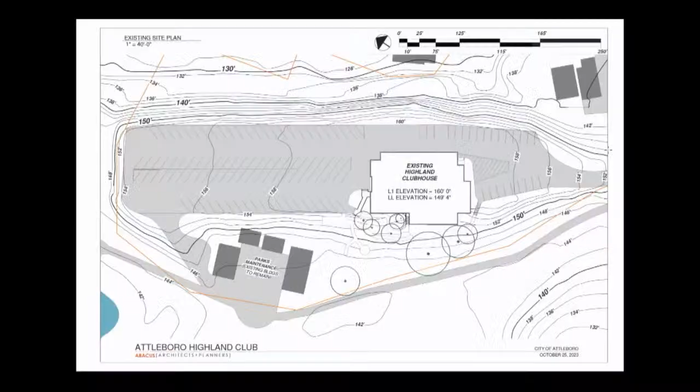We prepared demolition plans of all levels, but didn't include them in this package, but they're in the package that Mason has, and we prepared them obviously for the cost estimator.

So the reuse of the golf club, here's the site plan, and it's largely unchanged. There's some parking spaces just to the above, we can call it, to the east, or where it says rehab of Highland Clubhouse. There's some parking set up along there.

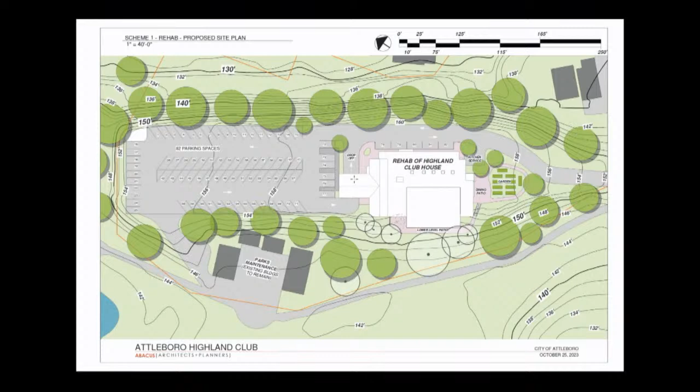The biggest change to the site plan is the covered drop-off, the organization of all of the vehicular circulation throughout the parking lot and throughout the site, with an organized loop where when you drive in, you can come around. There's handicap parking directly adjacent, and then there's a porte cochere or covered drop-off you can drive under. It's wide enough that you can have several cars lined up unloading, as well as other cars can go by. This is a feature of all of the options.

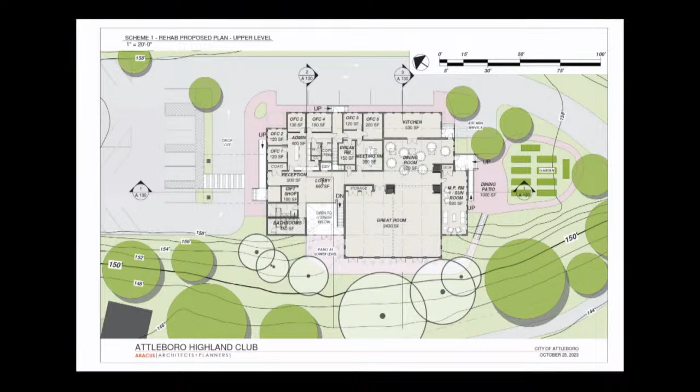The rest of it is really just moving walls, doors, windows. A lot of the building needs to be largely rebuilt to meet stretch code and the energy code, and to bring it up to date.

But there aren't others. That's it for the major moves: the drop off, the open to below, and the raising of the roof on the great room.

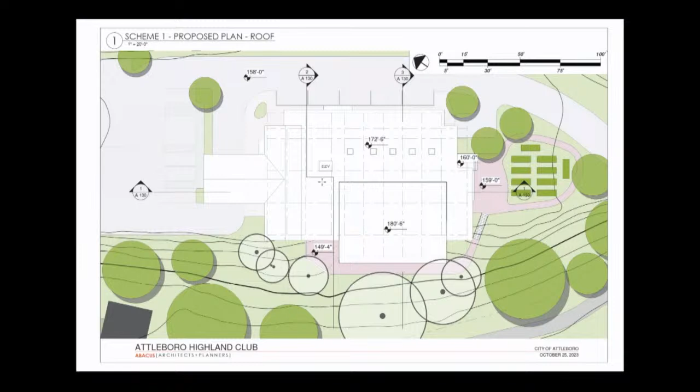And then those four little squares in a row are bringing light into interior rooms, because this is a very big floor plate—over 100 feet in each dimension—so the interior is inherently dark.

Thank you, Madam Mayor, for this suggestion. I think it's a really great suggestion to bring light into those rooms.

So that's the break room—a skylight in the break room, a skylight in the meeting rooms, and then three of these just four by four foot little pop-ups. Not a big deal, but just bringing a little extra light into the dining room.

So you want me to charge on to the other two schemes, or take a breath?

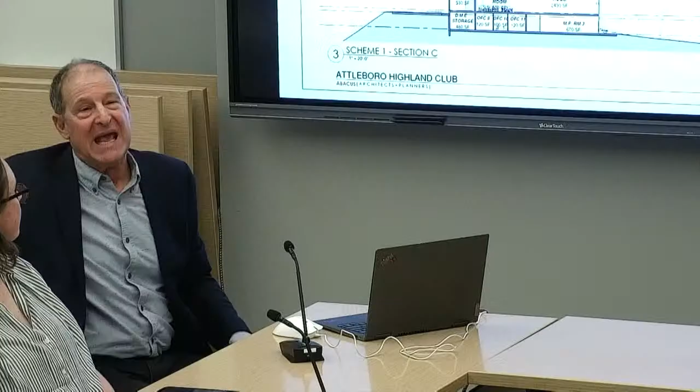This just needs to have paths connecting, it's just a gentle, walkable slope. Okay, you're already down there. But you're not at the fairway level yet, you have to go another 5 or 6 feet from the lower level, over like 80 feet of length, so you really just need a little bit more of a golf cart path.

It's not even, you can do it without any railings or anything, because handicap ramps are anything over 5%, or 1 in 20 slope. Once you get to that patio, everything can be under 1 in 20. It can all just be walking paths, not a problem, it's the same. The lower level is low enough to get you down to the fairway elegantly, without risk and everything. You wouldn't want to be any lower inside the building or with the elevator or anything.

So the elevator goes to 5 feet above the fairway. Okay, and you have to use ramps to get the rest of the way? No, just paths. Well, how about someone in a wheelchair? So a ramp is technically defined as something a little bit steeper than a path. A ramp is anything between 1 in 20 slope and 1 in 12, and you can't do anything steeper than 1 in 12, an inch in a foot. But that whole landscape can be designed to be under 1 in 20, so it's easy for a wheelchair. For a person self-propelling in a wheelchair, that's easy? Under 5% is good, yeah.

We ought to remember that this is what typically, in a 5-part architectural contract, is conceptual design. This is not design development, this is not construction documents. What we're doing here is determining if we have a site, if we know the program and it fits, and does the number fit within our budget.

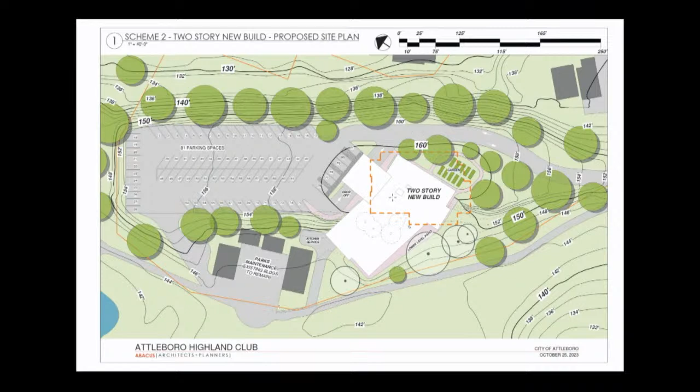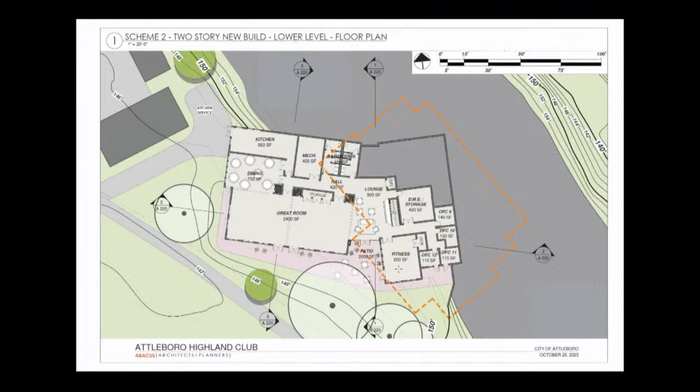We may be able to cheat that, we may be able to solve that problem, but it's limited because the parking lot slopes off towards the old driving range pretty significantly, and we can't make it too much steeper because of handicap access requirements.

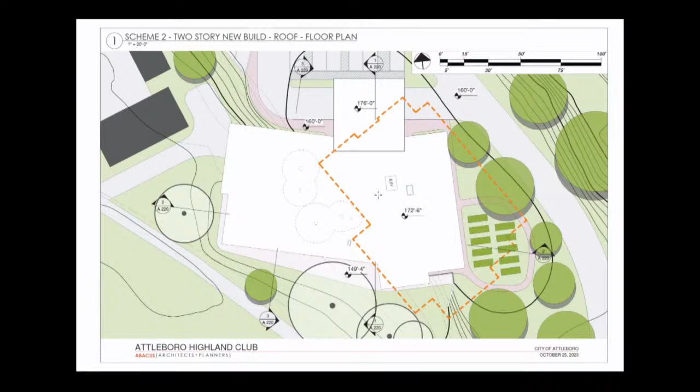So we've gone over the lower level plan. The roof plan is pretty simple—there's just a little skylight here to bring light into the conference room, which is otherwise not daylit. Here's the drop-off roof, which is raised a little bit to make sure we can get tall vans and things driving under there.

This would be a flat roof. It wouldn't have to be—nothing has to be a flat roof, you could put all kinds of roofs on it, but the way it's drawn is as a flat roof.

All right, I'm going to ask a monkey wrench question. If we took scheme 2, the upper floor, and raised the roof on the great room like we did in option 1, creating a one-level great room on the upper floor without the full-height ceiling, and had a room underneath it—is that something that would be possible? So almost we'd have two great rooms.

It's adding program that is more than Kelly is asking for, so almost certainly by the time we went around that track, we'd be shrinking the building to right-size it and conserve the city's resources. We don't want to oversize the building.

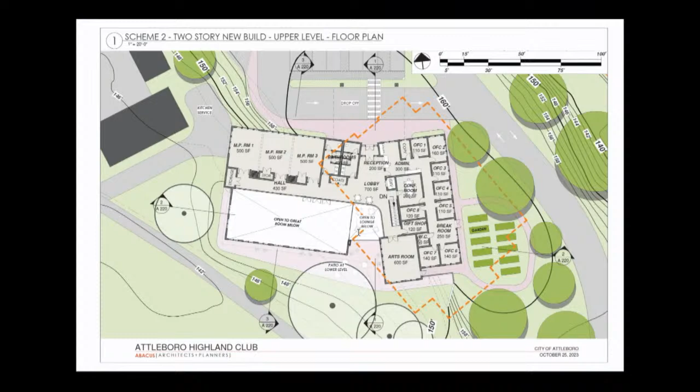That's low-cost space creation. I wouldn't want to sit here in 20 years with someone saying we need to put an addition on the building, when right now we could consider just building extra free space into it. I'm sure we'd find a way to fill it in the meantime, but if it's cheaper now, why not make it something to consider?

I think the other concern is having the great room down, so everyone coming through the main entrance, if you're going to the great room, either has to go down the stairs or take an elevator. And the kitchen is not as accessible as in the previous plan.

I think that concern was articulated really clearly by a member of the public who pointed out the need to have a separate dining room, and the adjacency of the kitchen to that dining room, but also the proximity of the kitchen to the great room, so it's multifunction. It was pointed out that the earlier version of this two-story scheme couldn't do that, because the kitchen and the great room were downstairs, but there wasn't a dedicated dining room or that kind of flexibility.

So we've addressed that - dining, great room, and lounge are a certain kind of social function that's primarily downstairs. Let's say you're renting it out for a wedding - they really don't need to go upstairs. Everything they need is downstairs, although they can use the lobby and lounge entrance upstairs, but downstairs they can use the lounge for hors d'oeuvres and move around. Everything downstairs is self-sufficient now because the kitchen is able to serve a lot of different spaces.

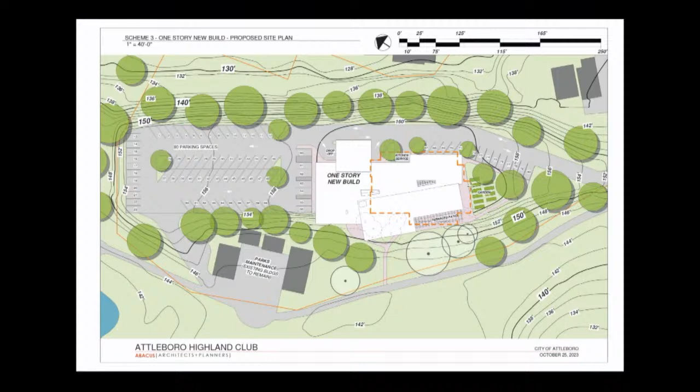Generally there are more new senior centers built in Massachusetts that are just single-story, everything you can roll to or walk to, than there are multi-story. The multi-story ones tend to get built on more expensive, tighter sites. You can't find a place to put a building, you need a lot of parking, so you stack the floor plates because you want it in the center of town, and the only site available is only so big. Multi-story is often a second choice, not when you have the options we have here of getting down to this amazing park.

But the idea here is that the floor plan is really everything on one level, except in this case the fitness room and access to the outdoors. After we had it all drawn as a single-story building, we had this discussion and dropped in the elevator and the stairway and this little lower lounge to get to the lower level. And then what's on the lower level? Well, the mechanical room, a couple of offices, small lounge, the fitness space, some bathrooms, and outdoor space.

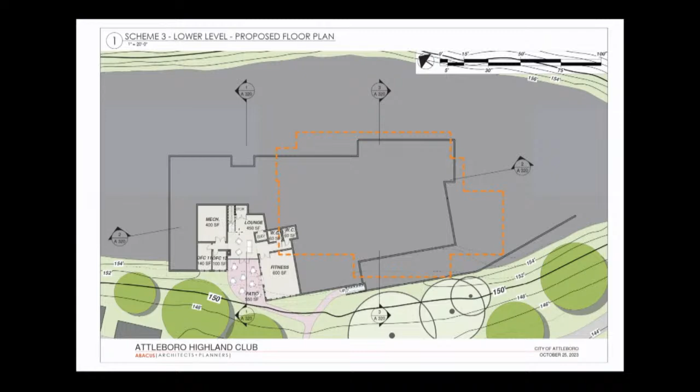So indoor fitness, outdoor fitness, access to the exterior, get the mechanical room into the dark, no need to use space with windows. And on the upper level, again, very compact entry sequence, like in the other new construction option. From drop-off, you come through the weather vestibule into the reception and lobby, and you have greeting from admin right there, staff all the time, somebody sitting right there saying hello to everybody, good morning to everybody.

Most of the offices, a large office and conference suite, bathrooms, the medical device storage, which also you could put more space downstairs and less up here, but the gift shop is here. Kitchen serves the dining room as well as can serve the multi-purpose rooms, can serve the great room. There's a folding wall for the dining room so that it can be either closed all the time, if that's kind of how programming works and you want acoustic separation there, or maybe that folding wall never gets closed.

And it's always just this big open area that really shares social space, arts, the tripartite multi-purpose room, and then this kind of central hallway, which is social hall, game room, hangout space. It's skylit, and it becomes the living room that makes this into kind of a big house for everybody.

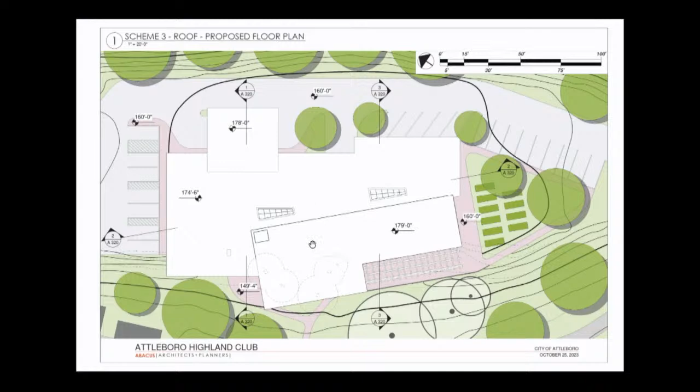There's an outdoor terrace with a trellis over it, could be a roof over it, but in this case it's trellis, maybe grapevines growing on it or whatever. Lots of outdoor terrace, and the view from that outdoor space looks out over the fairway. Here's those deciduous trees I was talking about earlier. Outdoor patio here, outdoor patio at the lower level there, and it's really just minimal development on the lower level. There's those skylights over the social space in between, and then the roof is popped up a little bit over the multi-purpose rooms, the great room, and these multi-purpose rooms, a little higher ceiling in those spaces.

Any questions on this scheme?

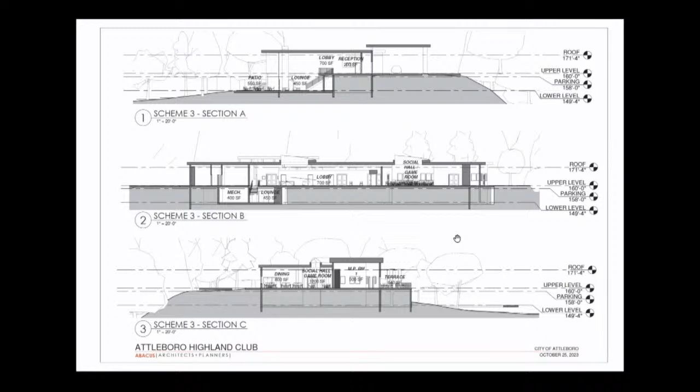You talked a lot about the orientation of south-facing scheme 2, but does scheme 3 have the same level of benefit from the reorientation of the building?

Well, this piece is rotated, the big rooms are rotated a little more to the south to improve that condition. In scheme 2, it's really oriented around to the south. Scheme 3, because it stretches out along that built plateau that was constructed, we believe, in the 50s when they built the golf course, and they just kept piling up the dirt from the water hazards there, is west-facing. So this longer building is predominantly west facing, but we make an effort for those tall glass walls of the multipurpose rooms and the great room to give them a slightly better solar orientation for shading.

Okay, you want to take us to the last but certainly not least? Right, so we hired PM&C cost estimators.

I'm assuming the Municipal Building Commission has seen their estimates before. They're one of the major players in public building in eastern Massachusetts. I think they did this building we're in, they did the estimates for it. We've done probably 30 projects where they estimate for us. We don't do our own estimates, and we're extremely comfortable with that, because we can always point out that we didn't make those numbers up, and it's not what we do day in and day out. We're not the experts, they are. The top row of numbers, 11 million, 13 million, and 13 million, are their product, their construction cost estimates. That's what we'd expect bid opening to show for the bids.

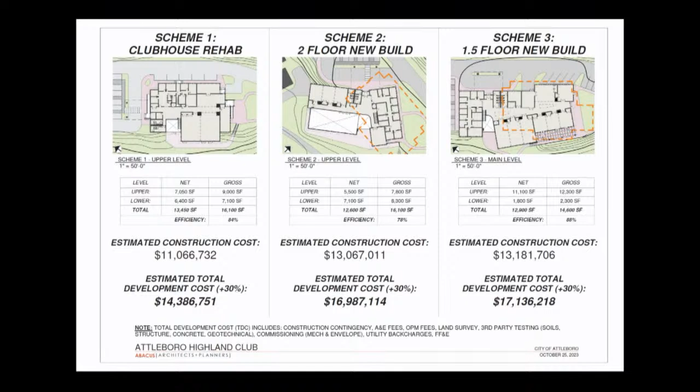She said it also has more retaining walls, more site walls, and this wonderful outdoor terrace, so there's more outdoor living space that we drew, and this trellis. I don't know, I'd have to look to see what they priced on that wonderful wood trellis, and of course we could strip it away.

But at any rate, she said all those development costs contributed to it. So again, all this can get iterated. If everybody was super excited about this scheme but said it cost too much, that would be the next study. But I thought that was an important explanation to share. So I'll stop there.

Along those lines, you delivered tens and tens of pages of cost estimates that we don't have here. They went to Mason, and that was my direction. If any members of the commission want to look at those documents, Mason will make them available electronically. It's a 46-page cost estimate, all numbers.

To me, it wouldn't make sense for me to read the 46 pages, I wouldn't know one page from the other, but perhaps some of the others on the commission may be interested. So if you are, Mason will make arrangements with you. Likewise, the...

...study that was done by the civil engineers with their drawings that went to the cost estimators, likewise the study done by the mechanical, electrical, plumbing, and fire protection engineers with their narrative, likewise our architectural outline specifications that talk about all the different architectural systems and what the assumptions should be. And again, I called Jack and said the existing building has horizontal clapboard on it.

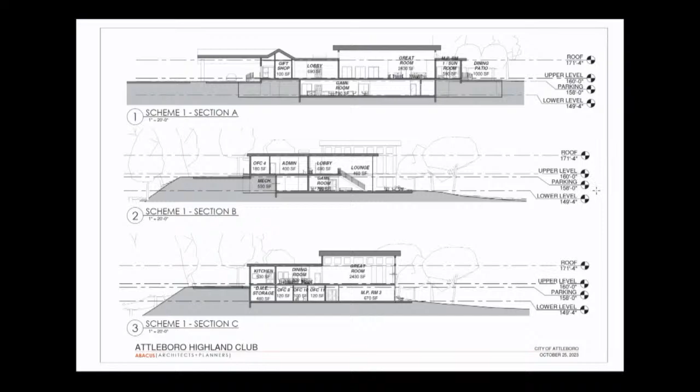The existing building sections - you've got, I think it's 149.4 to 160. So floor to finish floor is 10'8" on both floors in the existing building, lower level. Upper level is 11 - no, that's to the roof. So it's probably pretty similar. Let's say 10'8" is floor to floor on the upper level, and upper level floor to roof is 11'4".

So you've got an extra 8 inches upstairs. If you end up needing to, you can squash it - we can move ducts around so they're in vertical boxes blowing sideways, and pop up ceilings into coffers. We can do a lot to try to help, but the existing ceiling height is definitely below 9 feet with the acoustic tile. That's fine for a lot of rooms, but as you get to great big rooms, it starts to press on you.

What would it be in a new building? Well, what did we draw? Like in option 3, is it 10 - what?

Michaela says that because of the way she drew it in Revit, she just kept the floors the same in all of them. So it would need to be bigger though. I think 10 feet to the acoustic tile is plenty. It's fine, it doesn't have to be like this, but I think for any kind of room of size it should be more than that. For a great room, a 2,400 square foot room, it should be 12 feet.

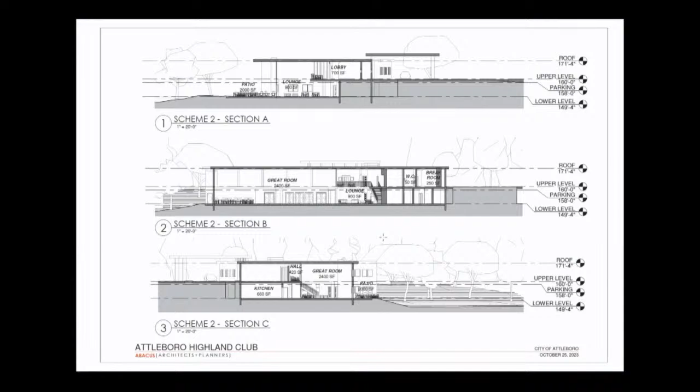Gail? I agree, I'm all for the reuse of the building, but I also look at option 3 and there are a lot of features in there that I like as well. But I'd prefer to reuse the building though. Terry? I prefer the reuse. I thought 3 was nice, but when you look at the dollar difference, it's a 2.7 million dollar difference. So the reuse for me seems fine.

Jackie? I liked 1, but I really would like to hear Kelly.

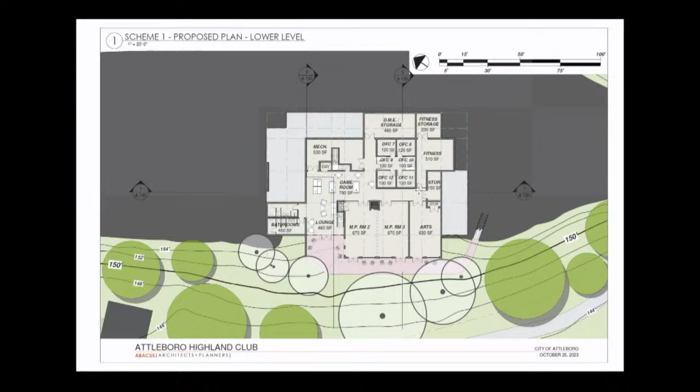David, couldn't your block of office spaces there, 7 and 8, have glass too? Sure—windows, glass, and they can have the option of privacy with shades, or open up so you could literally see through the whole floor. So light can flow—let's have less walls and more glass windows, you know what I mean? Like an office can have windows too. Right, if you ever want to change careers, we have a lot of extra desks in the office because so many people are working remotely—come up to Boston.

I really appreciate your effort—you guys obviously put a lot of time and effort into all of these things.

I wanted to share a few thoughts. One is that for Scheme 3, I understand there's some appeal to having everything on one floor, but I don't think it takes advantage of the site the way the other schemes do. Part of the appeal to me is putting it right there in the park, with the outdoors so accessible. Even though there's accessible outdoors in Scheme 3, I especially like Scheme 1 for that reason. I also have a hard time getting past $2.5 million—we have to be practical, and understand what the city can afford, what the taxpayers will think, what the city council will think, what the mayor and her finance team will think. We always have to take those things into account.

I commend you for the work you did, and Kelly for the work you did, because I think all the schemes work in terms of laying out office space and making sure the program is there. But for $2 million of construction cost, rehabbing that building is where my preference is. The art of the possible—I can just imagine standing at the podium at the city council saying, well, we could have spent $2 million less, but we didn't. That's a hard thing to sell.